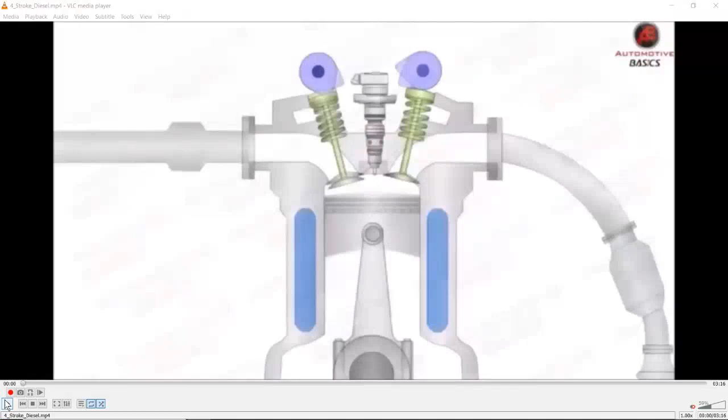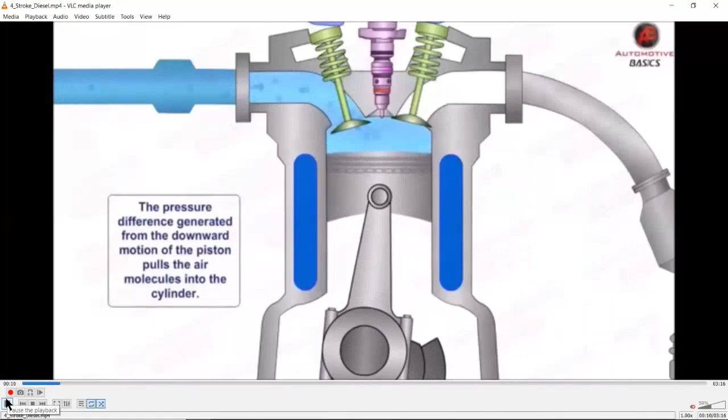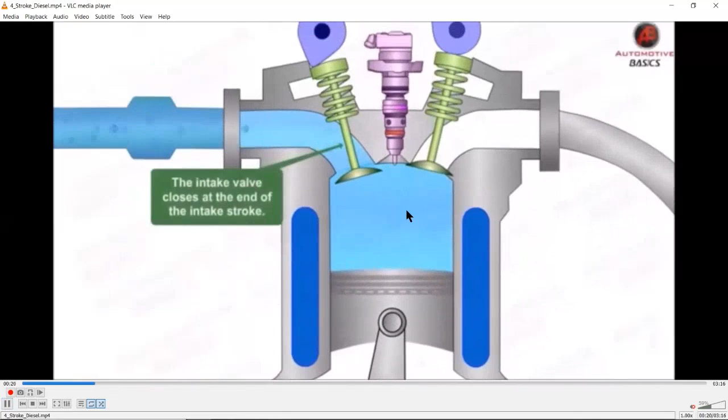The intake is more or less the same. You suck air into the system by creating a vacuum inside, if it is a naturally aspirated engine, and air flows in through the intake system. There is no fuel introduction at this point, because the fuel is injected directly into the combustion chamber later, and then we compress the air.

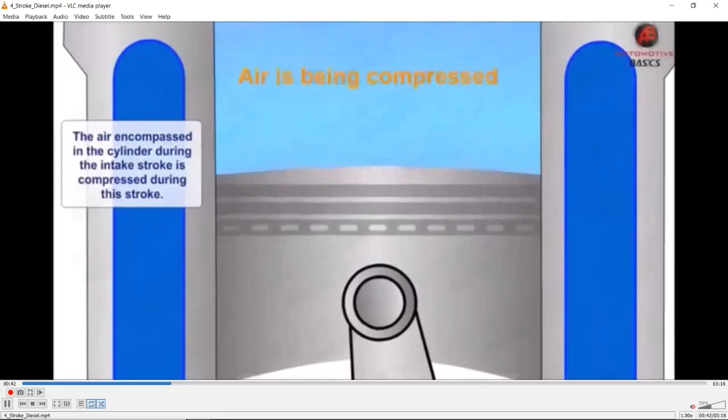Now there is no air fuel mixture here. During the intake stroke, we don't introduce air and fuel together, only air. That is the main difference. Both valves are closed and the piston goes up.

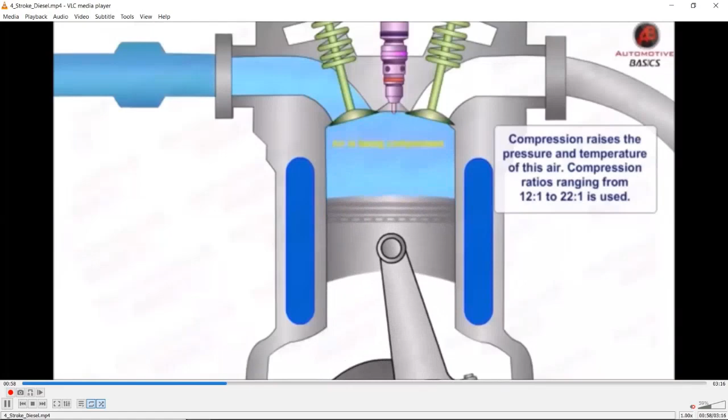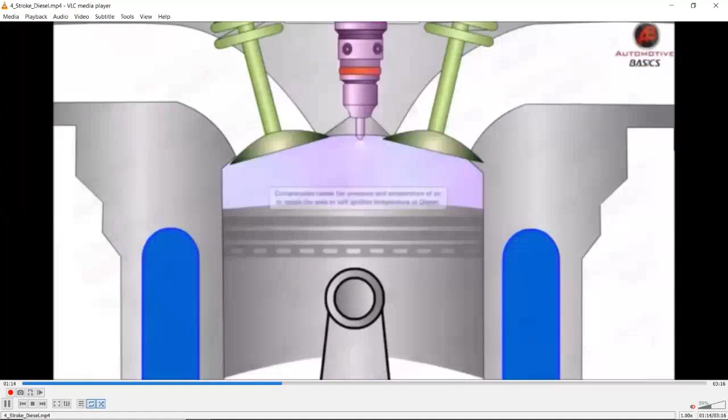And when you reach the right conditions of pressure and temperature, then you introduce fuel. That means you inject fuel through an injector, and this fuel penetrates into the compressed air within the system and starts burning on its own.

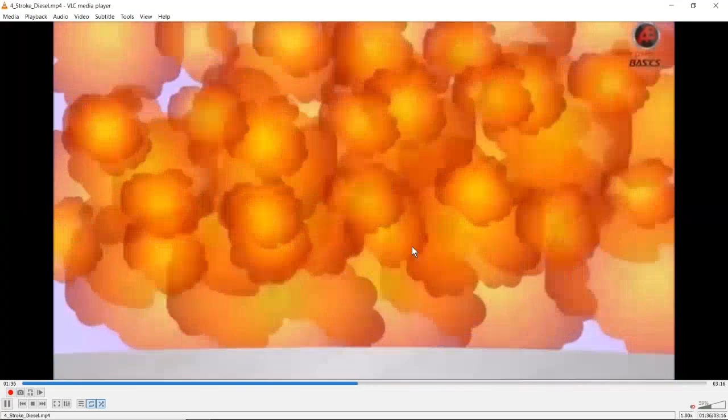So the fuel penetrates into the air, and due to high temperature and pressure, burning takes place at each and every molecule of the fuel. That is called diffusion combustion.

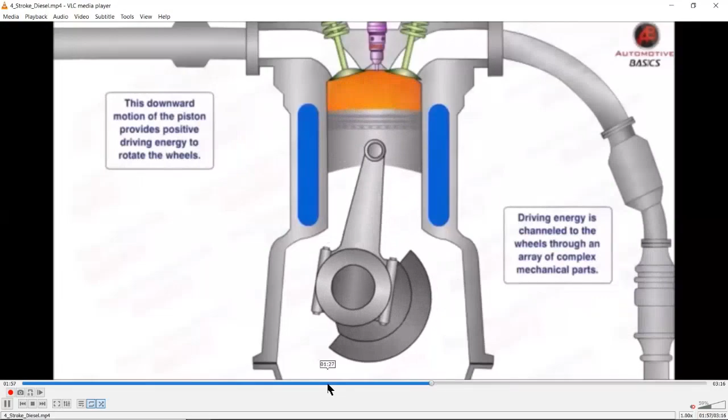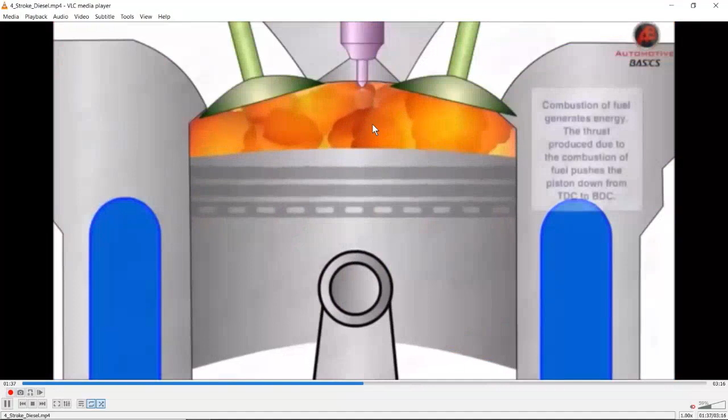Gasoline combustion is called premix combustion, where combustion begins at the spark plug and propagates across. But in diesels, fuel is injected, and as a result of this injection, the atomized fuel penetrates into the air molecules, and each and every molecule burns all across. Therefore this combustion is called diffusion combustion.

In petrol engines, the throttle valve is connected to the accelerator, so we control the airflow. In diesels, there is no throttle valve at all. So in diesel engines, the accelerator is connected to the fuel injection system. The petrol engine accelerator controls the airflow system, while in diesels the accelerator controls the fuel flow system.

So what we control is the amount of fuel introduced into the engine. There is no throttle valve, therefore the maximum amount of air is always sucked into the engine. We get the full amount of air into the system, and then we decide how much fuel is to be introduced. So there is no requirement of maintaining stoichiometric air fuel ratio, because it's not premix combustion.

Therefore, diesel engines operate in a wide range of air fuel ratios. If you want to produce more power, you have to have a low air fuel ratio, that means more fuel, less air. And if you want to produce a small amount of power, you can go for a high air fuel ratio, with a lot of air and a small amount of fuel.

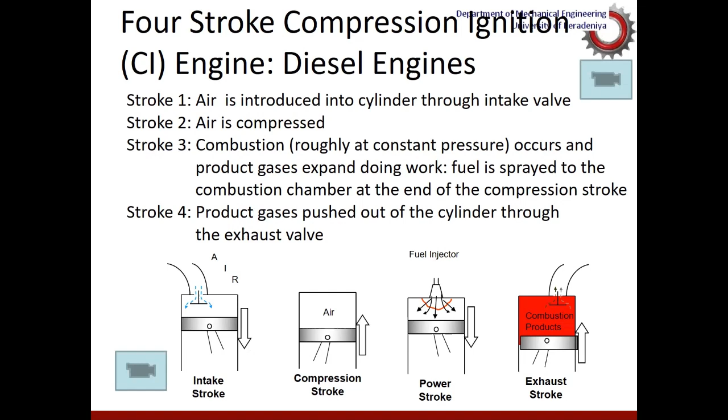So that is basically the air fuel system in diesels, and there is no throttle valve in the intake system. Therefore there is no introduction of fuel into the intake system, no choke valve, no throttle body, and no carburetor. That means airflow restriction in the intake system is much less.

In petrol engines, you have many components connected to the intake system, like the throttle valve, carburetor, injectors, and at each component there is a drop of pressure. But in diesels, you don't have any of these components. Therefore the pressure drop in the intake system is much less, so the volumetric efficiency is obviously much higher in diesel engines than petrol engines.

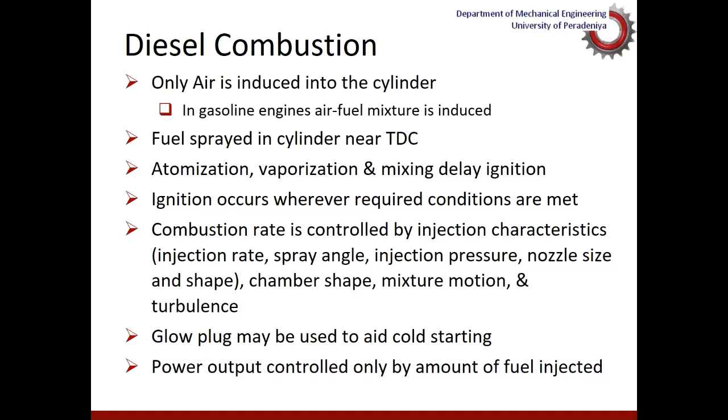Therefore, the combustion takes place at more or less a constant pressure condition.

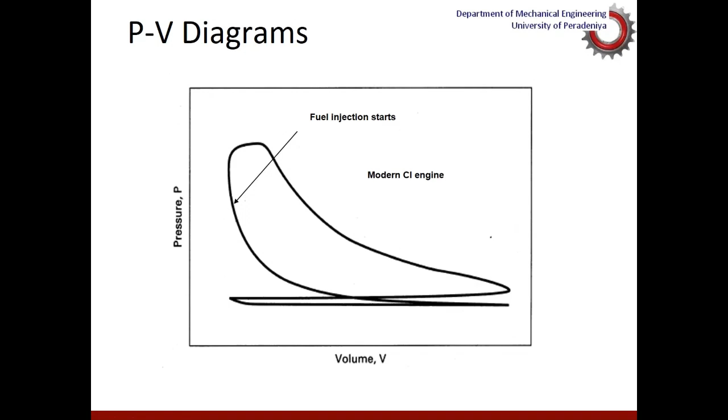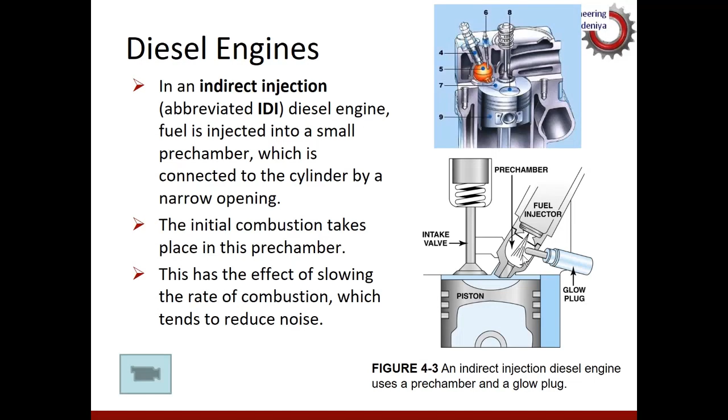A small pre-chamber is created within the piston, so that you can have higher fluid dynamics and turbulence over here, so that mixing could be done easily, and the atomization and penetration of this fluid into air would be enhanced. This technology is called direct fuel injection.

Direct fuel combustion in engines is not as smooth as indirect combustion. Therefore, direct injection technology is used for heavy vehicles like tractors and things like that, where you don't need very smooth combustion at all.

So this is the diesel combustion technology, and diesel is in fact introduced under high pressure conditions. Now in petrol engines, we introduce petrol into the intake system where the pressure is more or less around atmospheric or less than atmospheric. Or if it's a direct injection petrol engine, the fuel is introduced during the intake stroke, but the pressure is still less than atmospheric all the time.

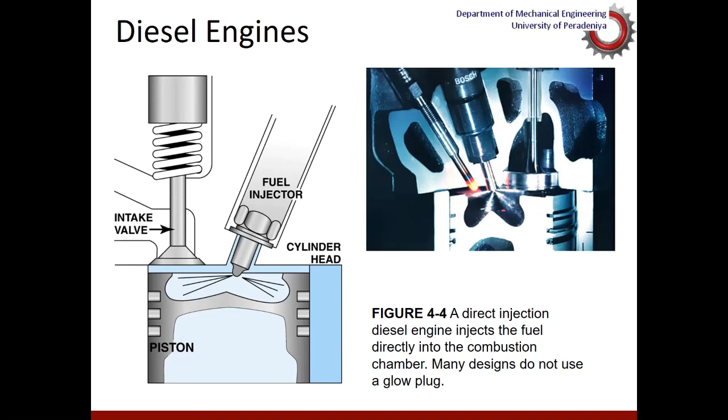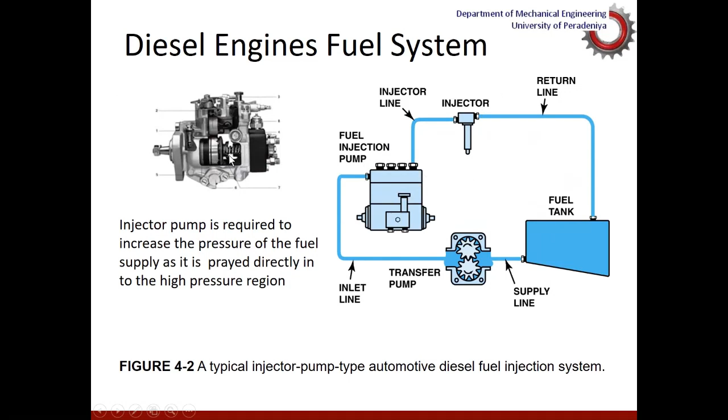For that, we use a fuel injector. There's a separate fuel injector pump connected to the diesel engine, and this pump maintains the right pressure for injection. The right pressure for injection is created within this fuel injection pump, popularly known as the injector pump. The accelerator pedal is connected to the injector pump, and the pressure and duration of injection is controlled by the injector pump, which is purely a mechanical device.

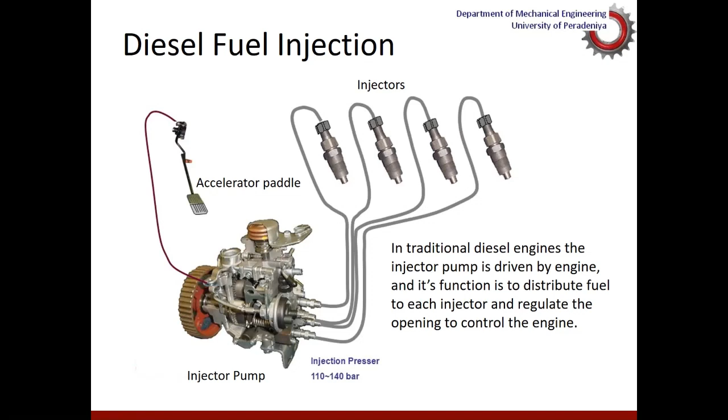When it comes to improvement of efficiency, combustion efficiency, and engine size, in later generations this conventional fuel injection system is replaced by an electronic fuel injection system that is more or less the same as the EFI system in petrol engines. In petrols we call it EFI; the same system in diesels is usually called the common rail injection system.

Common rail injection system is where you have a common rail which maintains the high pressure required for injection and combustion. The common rail is just a name for a compartment that keeps fuel at the right pressure for injection. A pressure pump is there, and all the controls of this injection system are handled by a microprocessor-based system, exactly similar to the EFI system in petrol. The only difference is you have to maintain high pressure for injection, which is maintained in the common rail. Therefore that system is known as the common rail injection system.

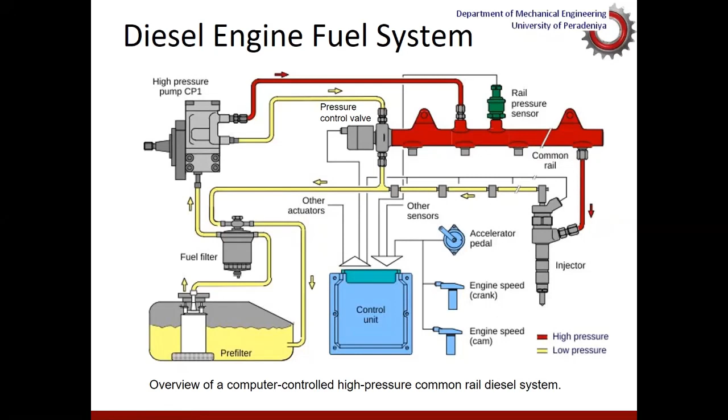So that is about diesel injection. The combustion characteristics depend on the spraying characteristics of injection - the injection angle, how long we inject, the pressure and flow characteristics, and things like that decide how good the combustion process is. I will discuss those later when we talk about the combustion process in detail.

What we discussed so far are naturally aspirated engine systems, where the intake air comes due to the vacuum created as the piston goes down. As the piston goes down, a vacuum is created, and this vacuum sucks atmospheric air into the combustion chamber. That is called natural aspiration, just like breathing. These naturally aspirated engines are what we just discussed.

But if you want to produce more power, you'll have to get more air into the system, mix more fuel with it, and burn it. As a solution, turbocharging is introduced for both diesels and petrols. Turbocharging means connecting a compressor into the intake system. Rather than being purely dependent on the vacuum created as the piston goes down, you suck air in mechanically using a pump - the compressor sucks air in. Therefore the air pressure can be more than atmospheric, creating an environment where pressure is above atmospheric by pumping air in.

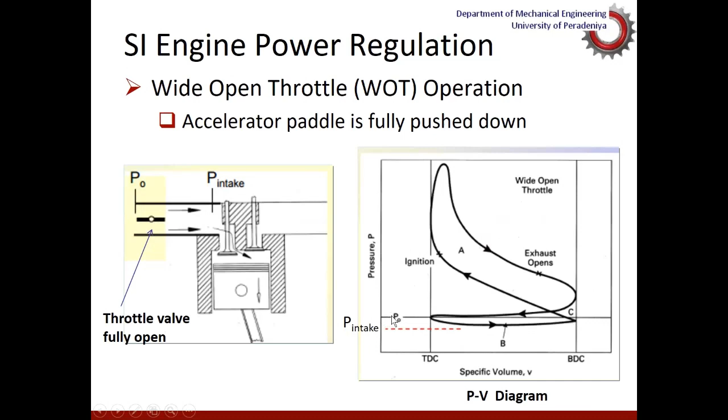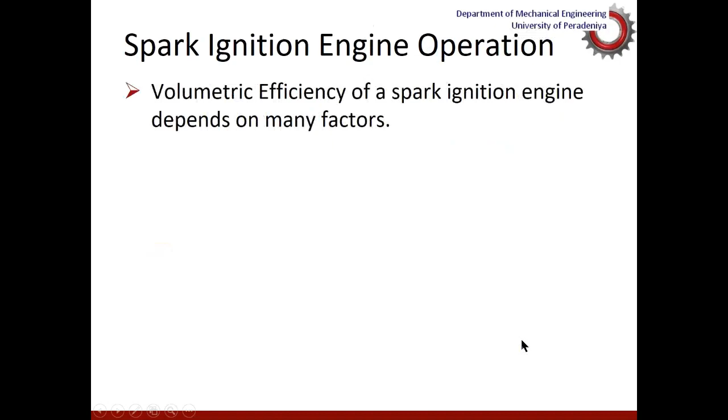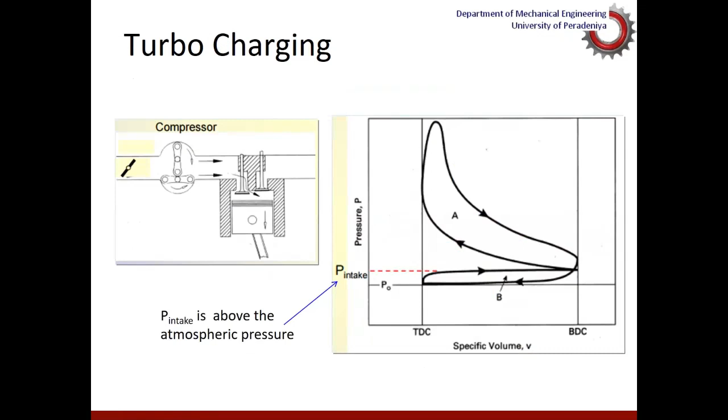If you fix a turbocharger into the intake system, you can have intake pressure above atmospheric. That means you are sucking more air into it, and then you can mix more petrol or diesel with the amount of air you got in, and produce more power. That is the idea behind turbocharging. I will talk about the thermodynamic aspects as well as the operational aspects of turbocharging later.

For the moment, just for introduction, turbochargers are a mechanical system operated by the exhaust gas flow. Usually turbochargers have very low friction, therefore a small amount of energy would rotate them at very high speed. So turbochargers typically turn at very high speeds - rotational speed is around 100,000 revolutions a minute to get the boost pressure.

The problem with pure turbocharging is that in this kind of recycled turbocharging, where the turbocharger is rotated using exhaust gases and you create high pressure, as a result the temperature of the gases goes up - the intake air temperature goes up. If the temperature goes up, the density comes down. So when you increase the temperature of air, the air density goes down. That is a huge disadvantage because, as I mentioned earlier, what we want is to mix and burn a certain amount of mass.

Mass burning is important because the calorific value of a fuel is defined as the amount of energy it releases when it burns unit mass of fuel. So you burn mass of fuel, therefore it has to be mixed with mass of air. If the density goes down, the mass also goes down.

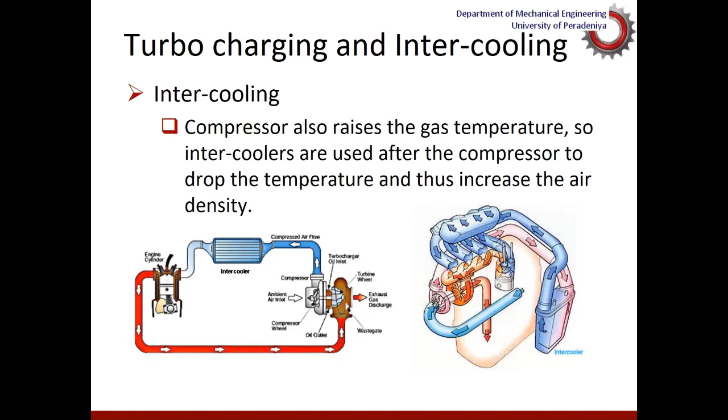Diesels, of course, always have advantages because the volumetric efficiency is high and the combustion efficiency is high. And since diesel is a self-ignition combustion process, we can go for very high compression ratios with diesels, so that the thermal efficiency of engines can be increased. Therefore, there are so many advantages of using diesels as far as the conversion of chemical energy to thermal or mechanical energy is concerned.

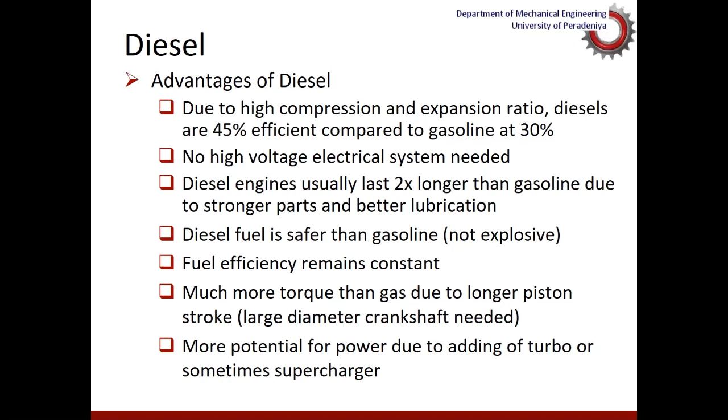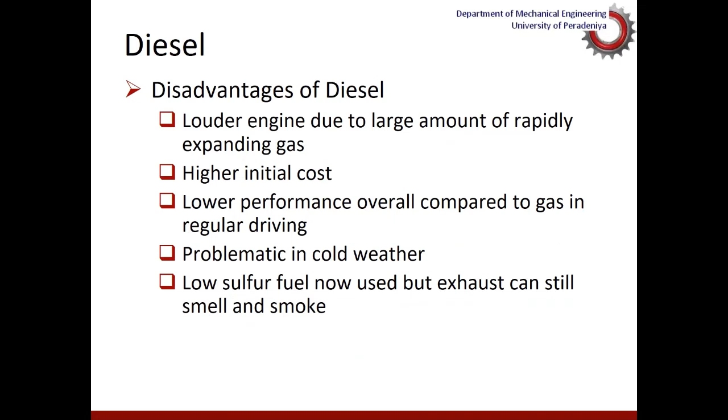But on the other hand, diesels, to withstand these high pressures and temperatures, we'll have to make these engines with special material, and use a lot of material to withstand the pressures and vibrations. Therefore, the cost of engines is quite expensive. We'll have to make it very rigid, and the size of the engines is large. So those are the disadvantages.

Finally, before winding up this gentle introduction to the course, the main challenge with IC engine design is usually that the engines are really inefficient systems. Thermal efficiency of a petrol or diesel engine is in the range of 30 to 35%. That means about 60 to 70% of energy goes to waste.

It goes to waste in the form of friction and heat. There are so many rubbing components, so there's a lot of friction and a lot of heat generated. Heat goes out, and all these things account for losses. So when you have 100% of chemical energy coming into the engine, with all these losses, the maximum efficiency is around 30 to 35%.

Under different conditions it varies, and then there are losses in the gearbox and drivelines and various other places. Therefore the real outcome you can get is maybe a maximum of 20 to 25%, depending on operating conditions. On top of that, there are other losses like aerodynamic losses, inertia losses, rolling resistances, and many things. So those are the challenges in IC engine development.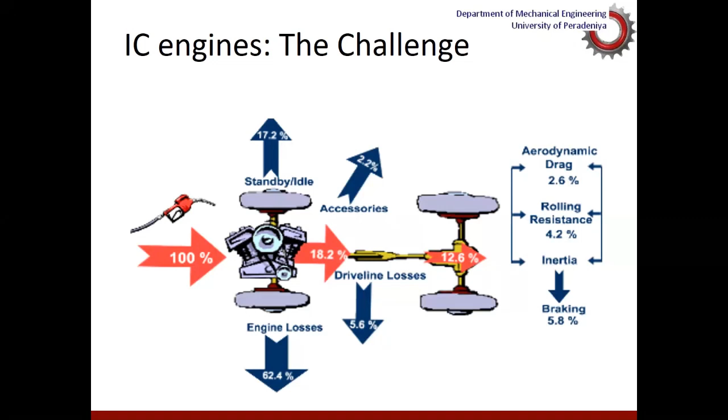Therefore, as mechanical engineers, we have to have an understanding about IC engine technology, its developments, and alternative options like hybrid systems and electric vehicles. In the coming time, I will discuss a little more on these different things mentioned in this lecture, the operational aspects of IC engines, as well as the thermodynamics aspects of different processes of IC engines. That is the plan, so from next class onwards, I will go into an in-depth discussion on different processes of IC engines.